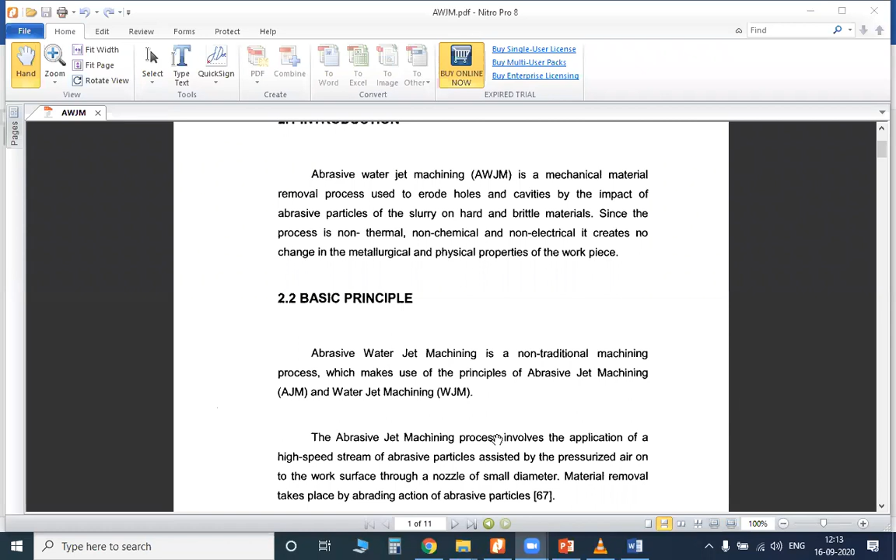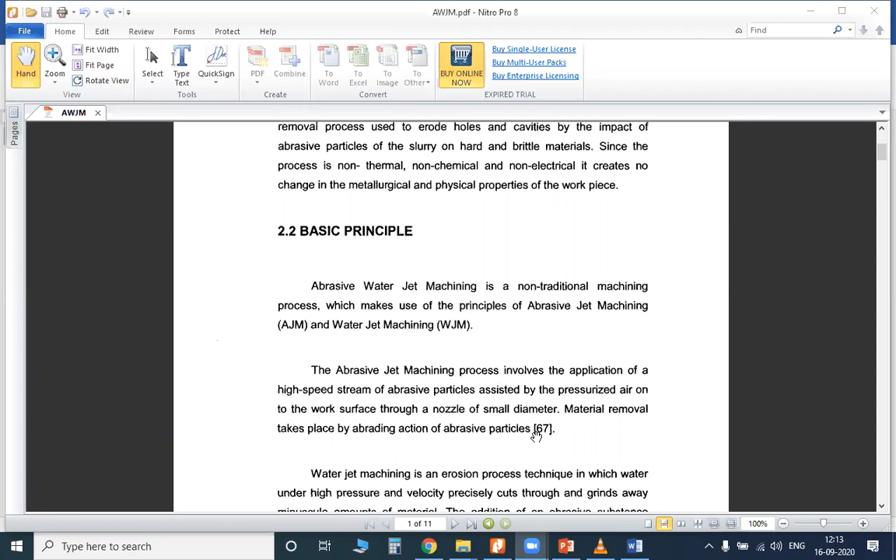Clear? The abrasive jet machining process involves the application of a high speed stream of abrasive particles, assisted by pressurized air, on the work surface through a nozzle of small diameter. The material removal takes place by the abrading action of the abrasive particles. This is the process they describe.

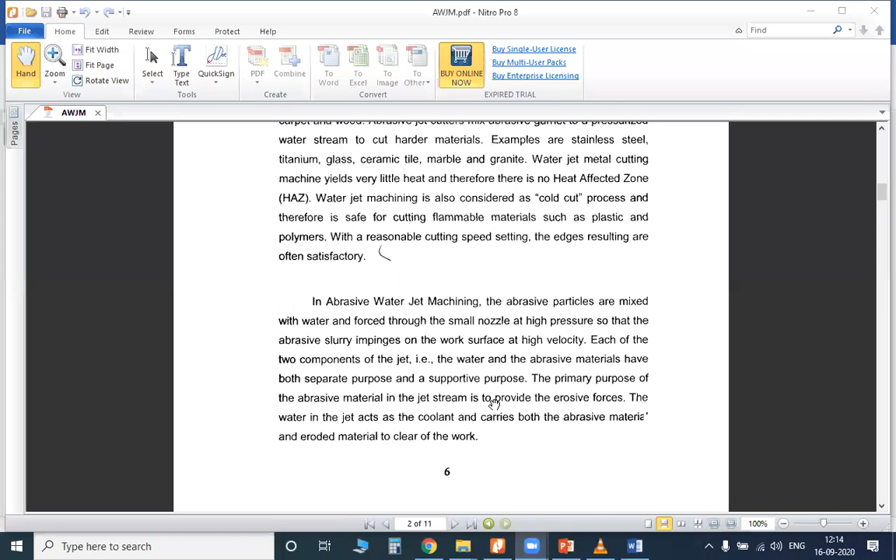So the diagram is... this is the diagram, students, of abrasive water jet machining. Here the workpiece is placed on a flat surface using some fixture, so the workpiece is constant and does not move. In one container, air or water is taken with the help of a control valve and pressure.

High water is to be sent into the mixing chamber. The parts of an abrasive water jet machining are: the workpiece, the nozzle, the mixing chamber, and the abrasive slurry, the abrasive particles which are going to be sent. The other parts are the control valve, the pressure relief valve, and the air filter cum dryer. These are the main parts of an abrasive water jet machining.

What considerations are to be taken in the process? The water is taken with the help of high pressure and a controlling valve. A filter is also inserted at this place. With the help of high pressure, the water is moved to the mixing chamber, and at the same time the abrasives are also moved to the mixing chamber.

When the abrasive hits the water, it converts into slurry, which is moved to the nozzle. The nozzle converts the liquid into higher kinetic energy. The total slurry moves through the nozzle, which acts to convert the liquid into higher kinetic energy. The nozzle has a very small diameter.

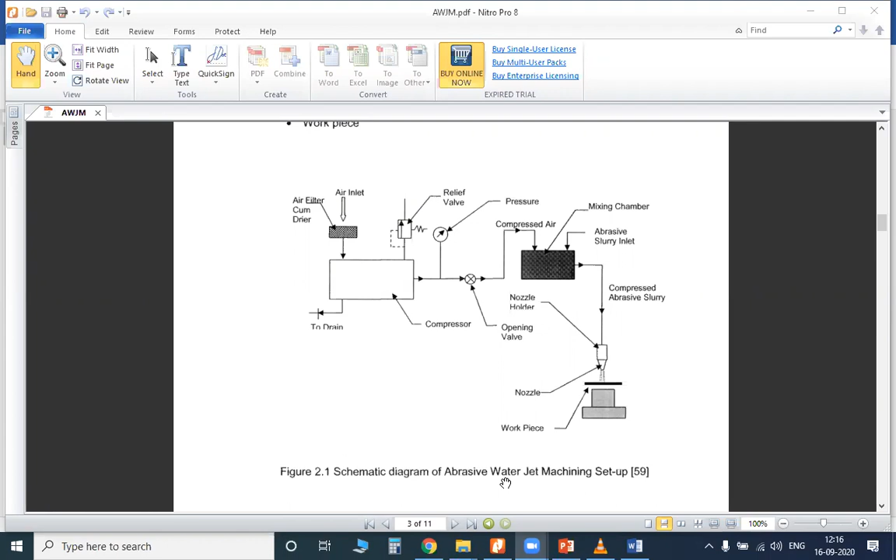Is this clear, students? This is the main process of abrasive water jet machining. The parts are the workpiece, the nozzle, the mixing chamber, and the abrasives taken here, along with the water content, the pressure valve and control valve. The water, with the help of a filter and high pressure, is controlled by the control valve which sends it to the mixing chamber. At the same time, the abrasives are sent to the mixing chamber.

When the abrasives strike the water, some type of energy is generated, and the total slurry moves to the nozzle. The nozzle tip is made up of tungsten carbide and has a very small diameter, not a large one. The nozzle acts to convert the liquid into high kinetic energy.

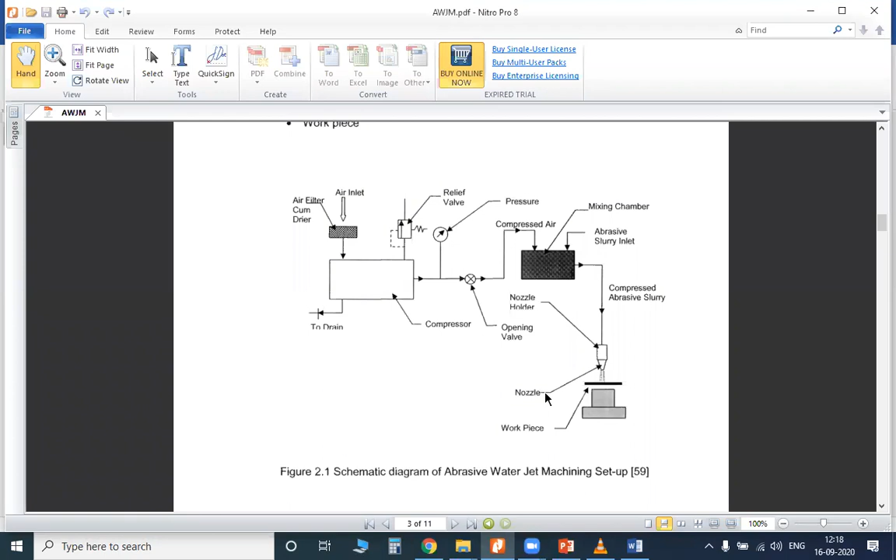We have to observe one thing: the water acts as a coolant when the abrasive particles are sticking on the workpiece. Due to the water, the particles which are stained or attached to the workpiece are vanished when the machining is completed. This is the process of abrasive water jet machining.

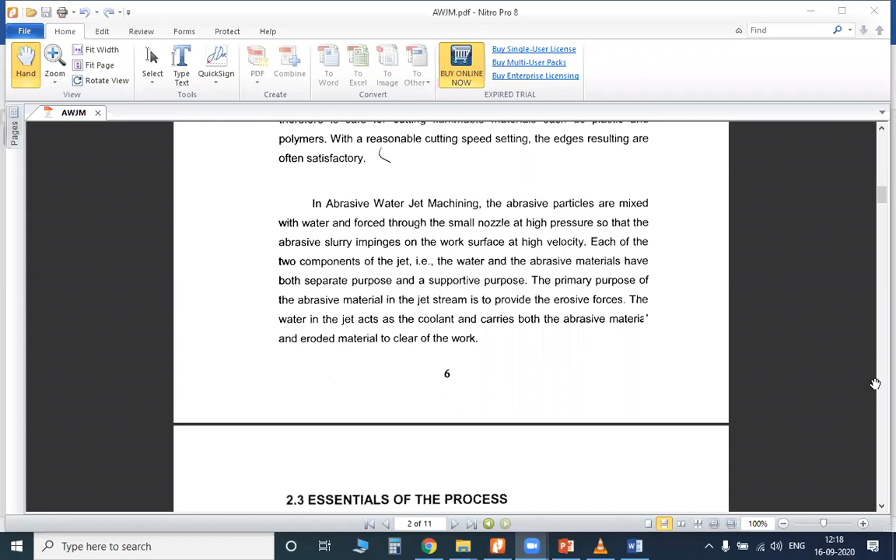Now we will see the points one by one. Water jet machining is an erosion process technique in which water under high pressure and velocity precisely cuts through and grinds away minuscule amounts of material. The addition of an abrasive substance greatly increases the ability to cut through hard materials such as steel and titanium. With only water jet machining we can't cut hard materials, so we mix both abrasives and water together to cut hard materials.

Water jet machining is a cold cutting process. One point to consider here is that it is not a heating process.

It is not a heating process, it is a cold process. It is not a heating process because it is having very little heat, because we are going to be using water.

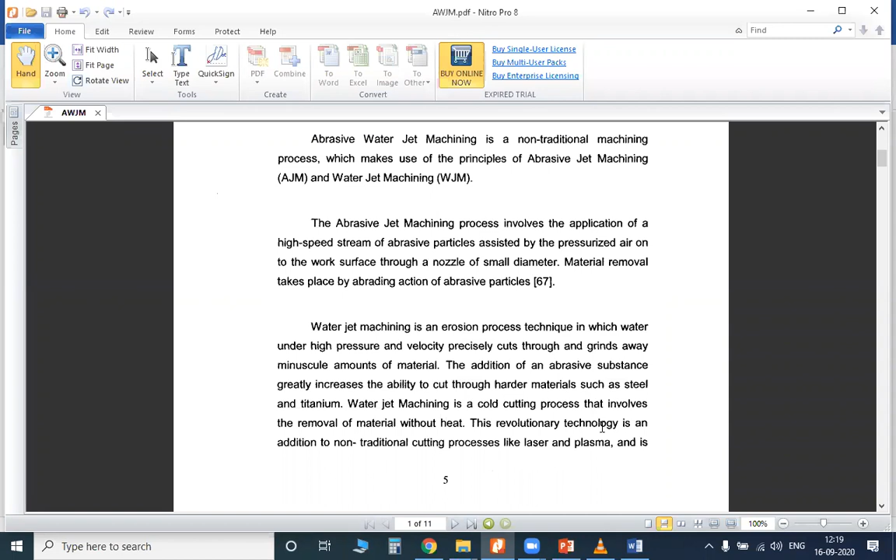It removes the heat of the abrasives which are going to be striking on the workpiece. So this revolutionary technology is an addition to the non-traditional cutting processes like laser and plasma, and is able to cut through virtually any material.

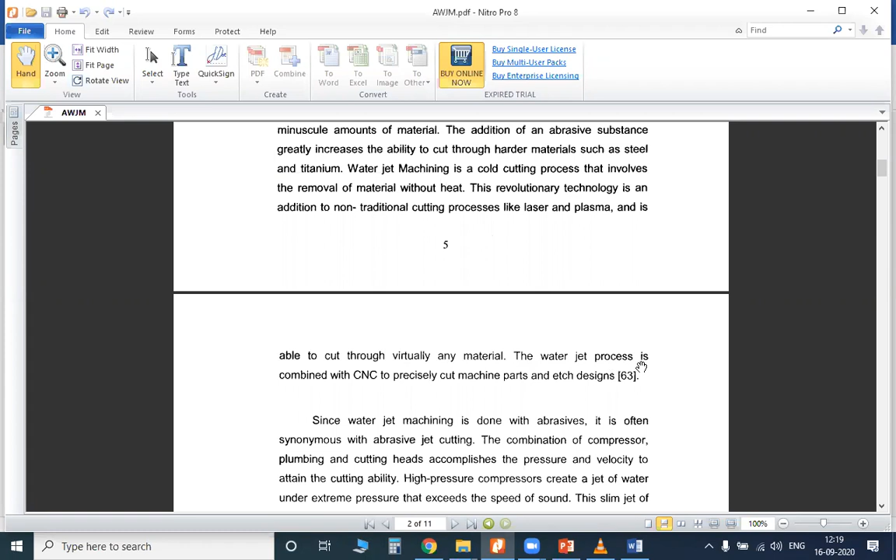So the water jet process is combined with a CNC. Here the total process is combined with a CNC.

See here students, purely water flow without an abrasive can cut materials such as foam, rubber, plastic, cloth, carpet and wood. The abrasive jet cutters mix abrasive garnet into a pressurized water stream to cut harder materials. So here they had given clearly, when only water is pressurized on the workpiece, what type of materials can be machined.

So these are the materials that can be machined. But when abrasives are mixed with the water, these materials can be machined: stainless steel, titanium, glass, ceramic tile, marble and granite.

So this abrasive water jet machining is purely used in heavy industries, to cut different types of materials, different types of machining, and different types of designs.

And here the abrasive water jet machining is also used for etch type designs. Etch type designs are nothing but what we can see on iron doors, the embossing of designs. So those types of designs can also be cut through abrasive water jet machining.

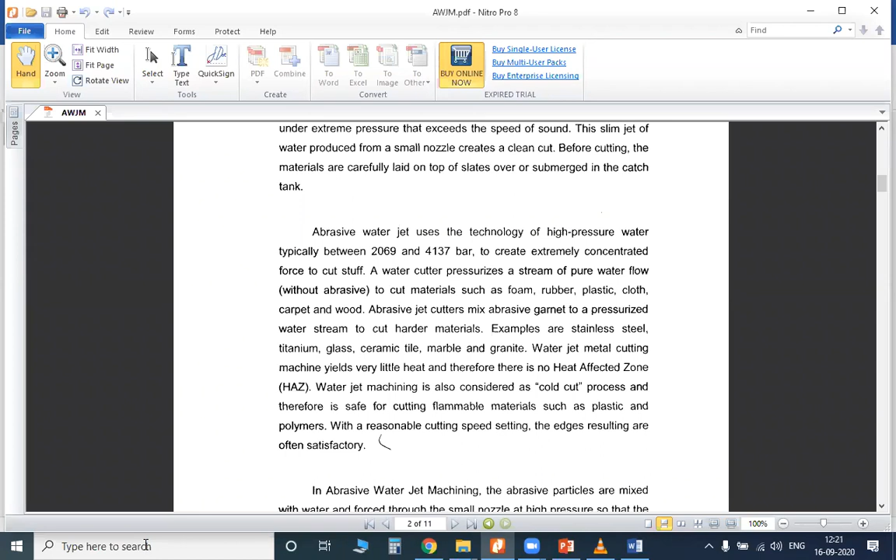Clear? So in abrasive water jet machining, the abrasive particles are mixed with water and forced through a small nozzle at high pressure, so that the abrasive slurry impinges on the workpiece at high velocity.

So each of the two components of the jet, the water and the abrasive particle materials, have both a separate purpose and a supportive purpose. Clear students, what I had told you now?

So the water in the jet acts as a coolant and carries both the abrasive materials and the eroded material to clear the work. So here both the water and the abrasives that you are considering act like the tool to cut and machine the workpiece.

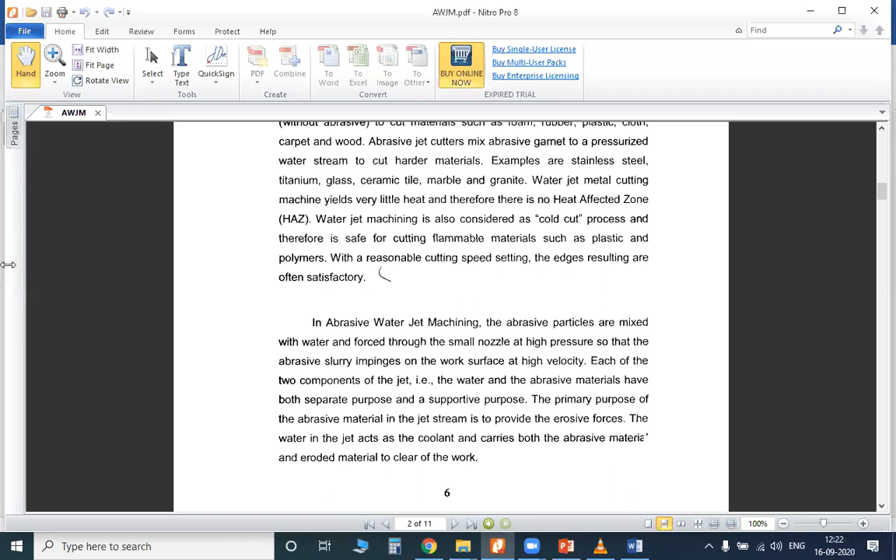At the same time, due to the water content, if any of the abrasive particles attach to the workpiece, it can be removed also. So both processes are taken together. So these are the different machining parts that are going to happen.

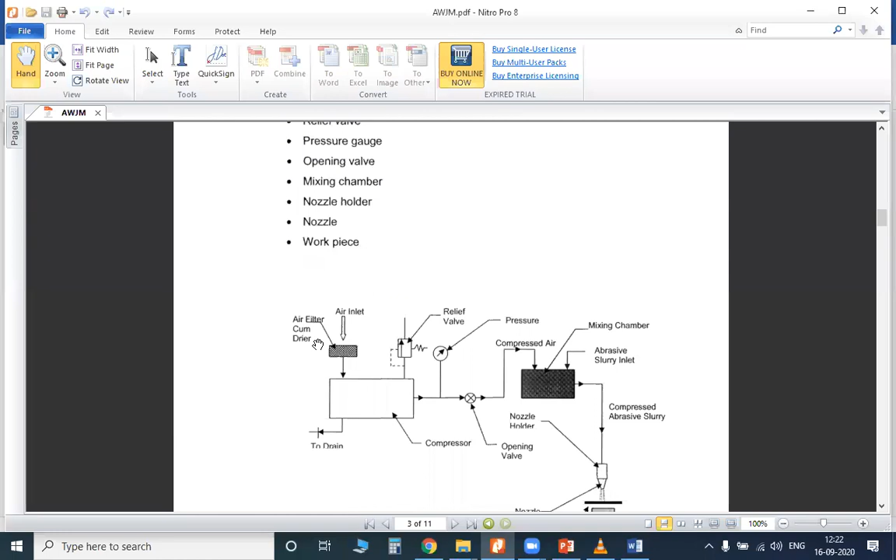And here, what is meant by an abrasive slurry? So the slurry in this process is a mixture of abrasive particles and a liquid content, mainly water. So the ratio of abrasive to liquid - this is the doubt you have to clear - can vary from 1:6 to 1:14.

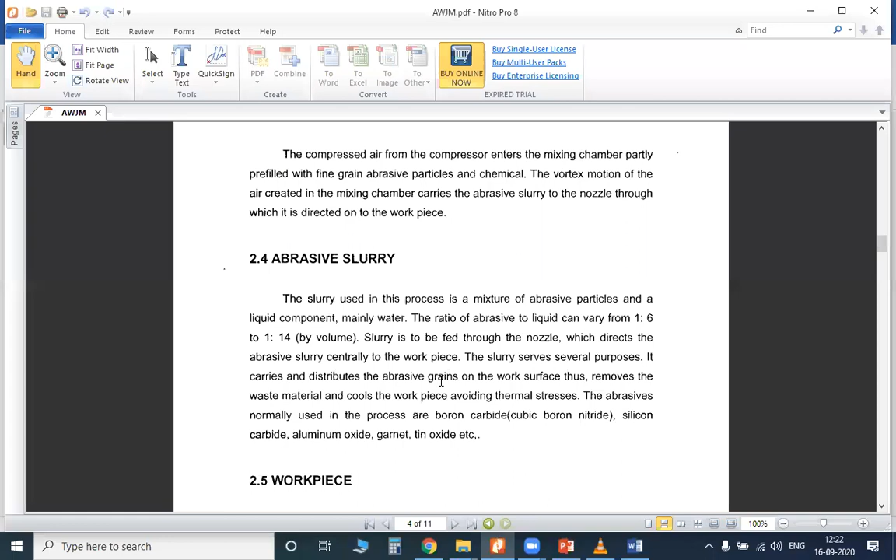So in this ratio, both are taken. So the slurry is fed through the nozzle, which directs the abrasive slurry centrally to the workpiece. So in this nozzle, the total content is taken in the center of the nozzle, not in the walls of the nozzle or any other place.

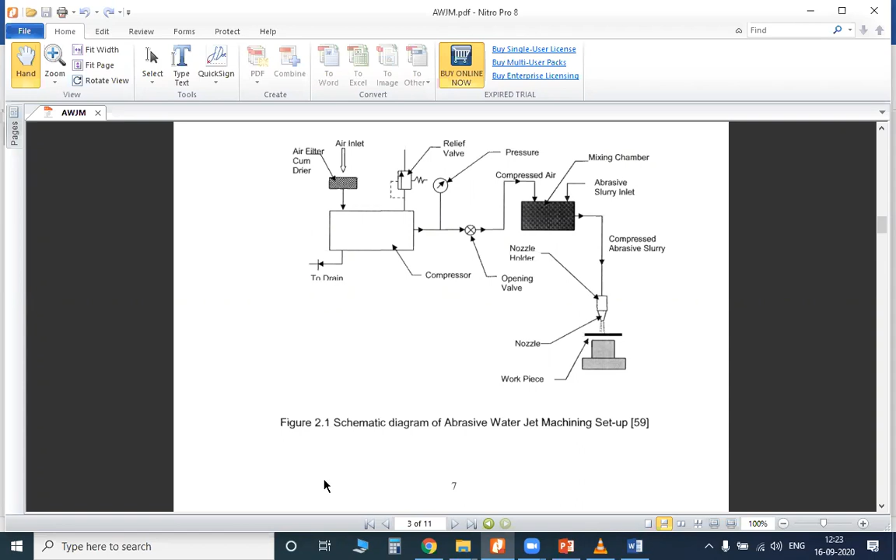It is directly striking on the workpiece, perpendicular to the workpiece. Clear? And here the slurry serves several purposes.

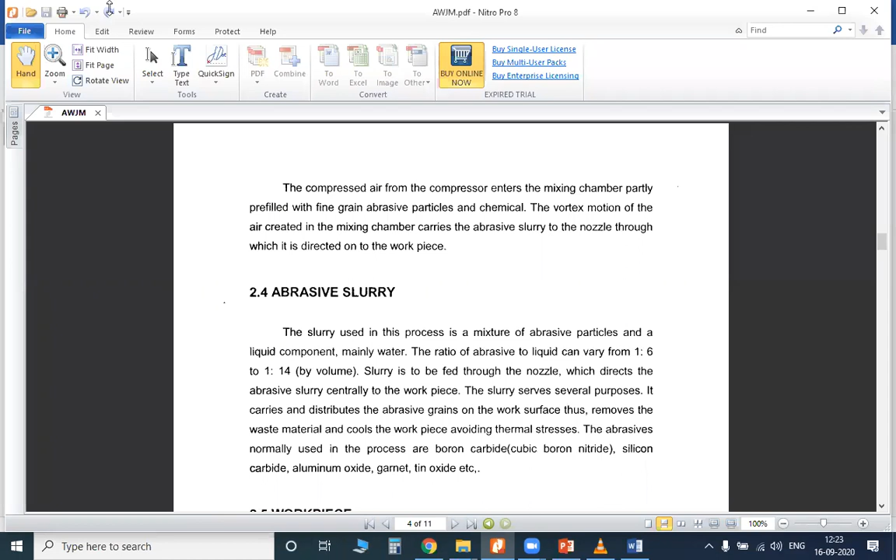It carries and distributes the abrasive grains on the work surface, thus removing the waste material and cooling the workpiece, avoiding thermal stresses. So the abrasives used here are boron carbide, cubic boron nitride, silicon carbide, aluminum oxide, garnet, and tin oxide, etc. These are the basic abrasives used in abrasive water jet machining.

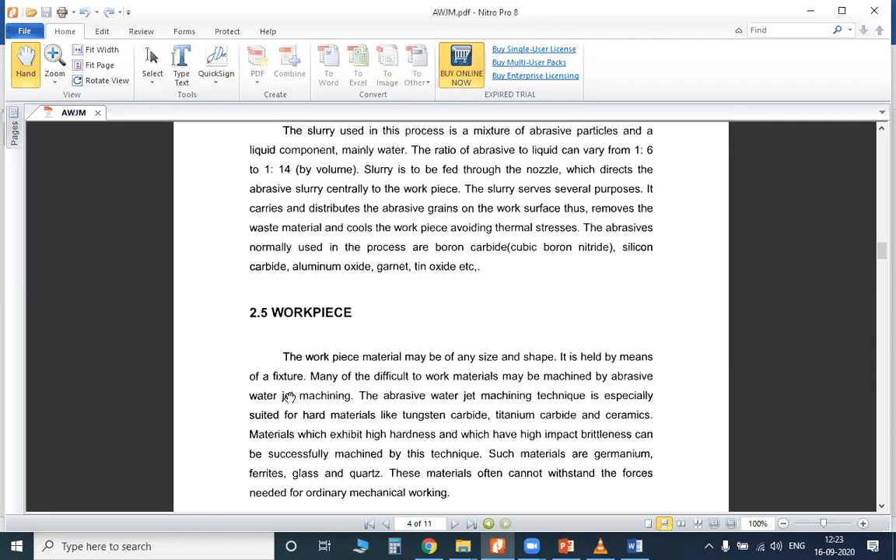So here the workpiece material may be of any shape and any size. It is held by means of a fixture. So many difficult-to-machine work materials may be machined by abrasive water jet machining.

So if the materials have very hard toughness properties, those types of materials can be easily machined with the help of abrasive water jet machining. Clear. So hard materials like tungsten carbide, titanium carbide, and ceramics - these types of things can be machined.

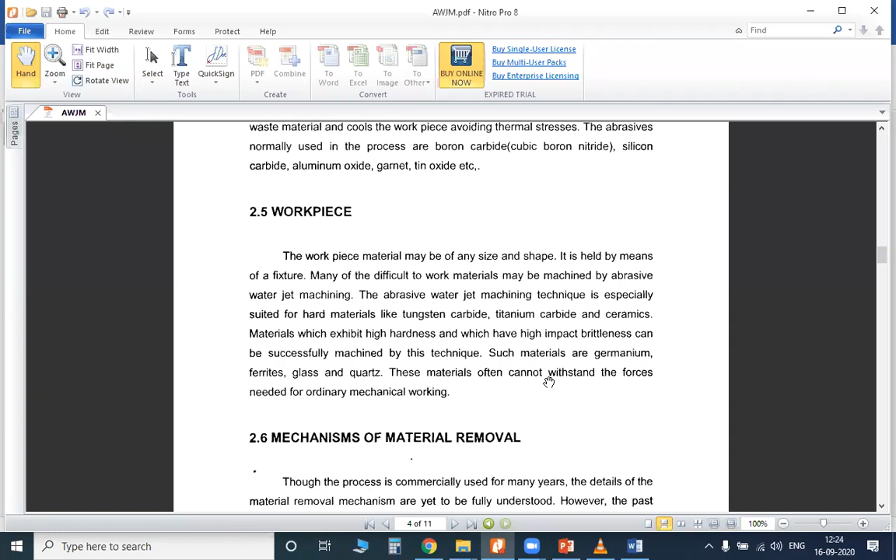And materials like germanium, ferrites, glass and quartz also. So the mechanism of material removal here is the direct impact of the abrasive particles on the workpiece.

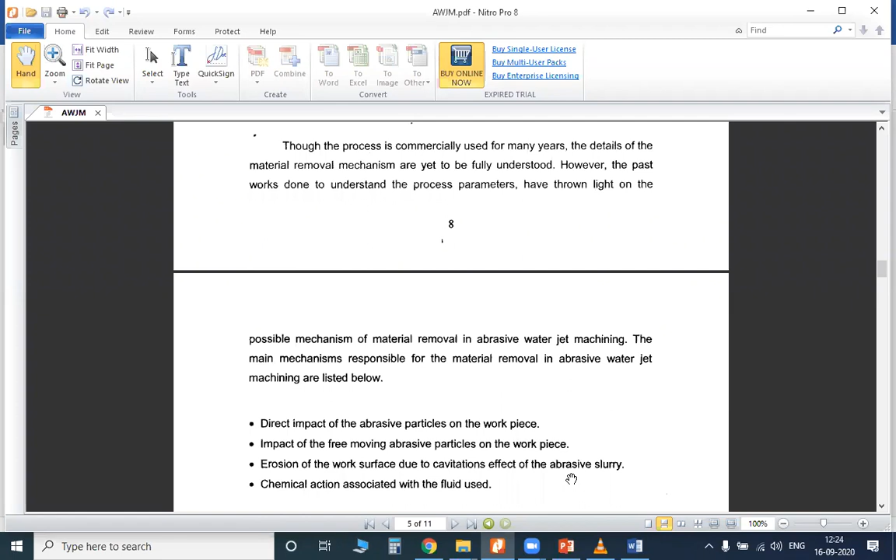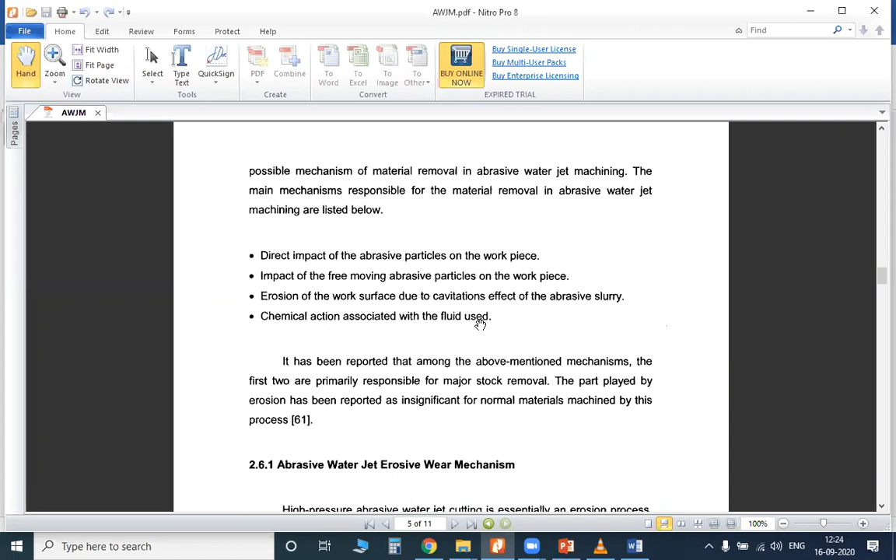So it's the impact of the freely moving abrasive particles on the workpiece, erosion of the work surface due to the cavitation effect of the abrasive slurry, and chemical action associated with the fluid used. So these are the material removal processes that are carried out here.

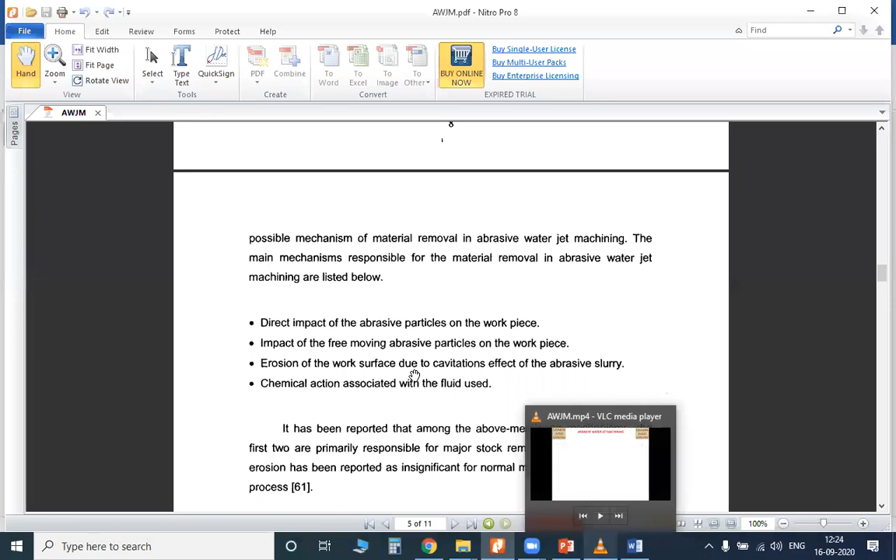So now we will see the video, an animation video, showing what is going to happen for abrasive water jet machining. Clear?

So this is a video of abrasive water jet machining. In this, one pipe is taken, and against it, a control valve is connected. Next to the tip of the pipe, a nozzle is connected.

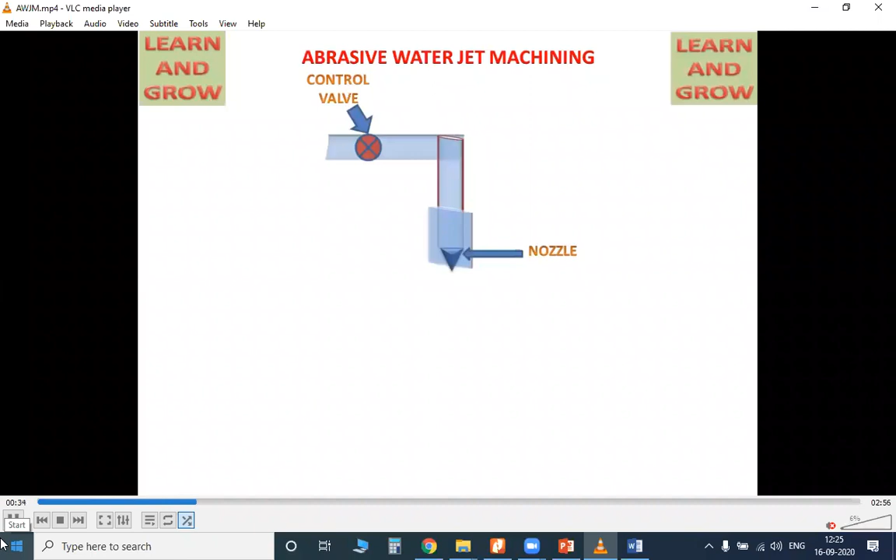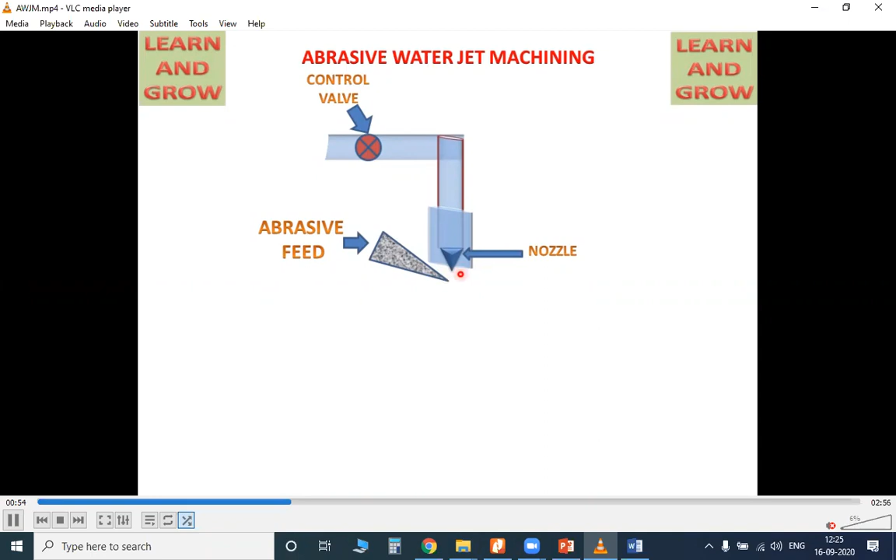The nozzle is made up of titanium and tungsten carbide. Here the abrasive feed is taken, so the ratio of abrasive to water content is taken to the slurry mixing chamber. The abrasive feed can be silicon carbide, aluminum oxide, boron carbide, or any other abrasive, depending on the workpiece material. It can be chosen accordingly.

So the abrasive tube is connected to this mixing chamber for the abrasive feed. At the same time, water, through a nozzle with a very small diameter, is poured into the abrasive tube. The workpiece is placed on a fixture which cannot be moved; it is a standard setup.

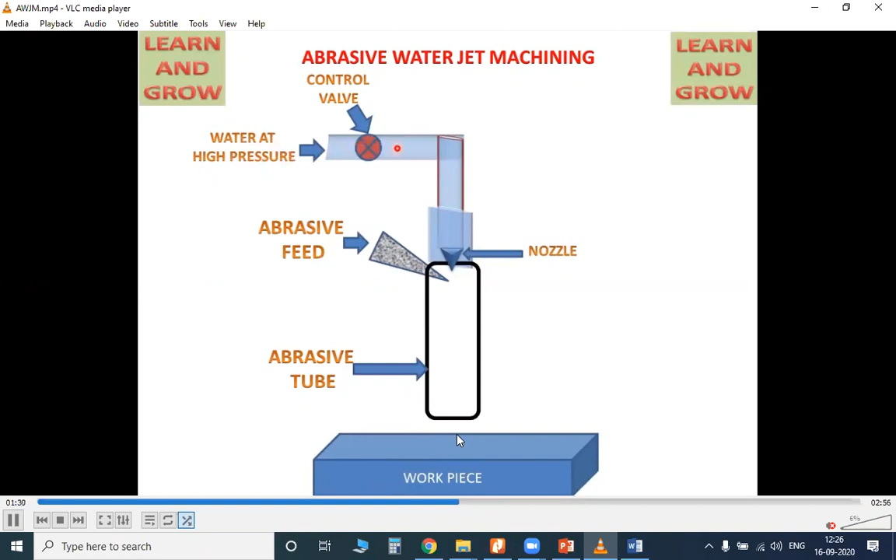Due to the nozzle, mixing takes place, and from this nozzle it converts the liquid into higher kinetic energy. This is the total chamber. From here, water at high pressure is given, and from here the inlet is pumped. So from the nozzle, it centrally strikes over to the workpiece.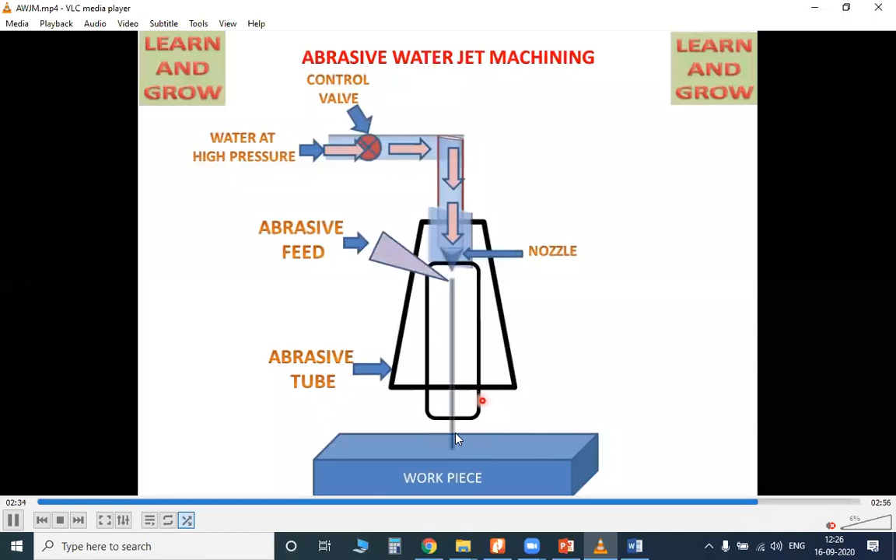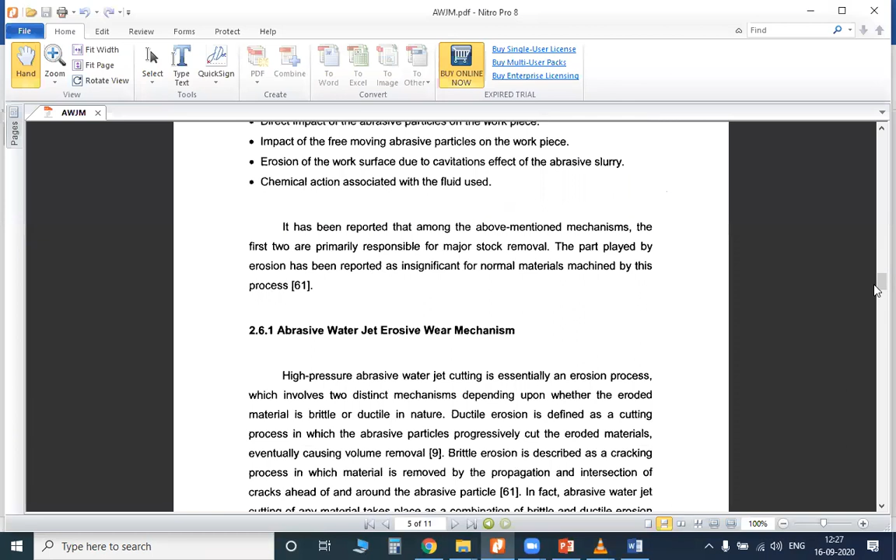Yes friends, so this is nothing but abrasive water jet machining. So we will see what are the disadvantages, what are the advantages, and what are the applications.

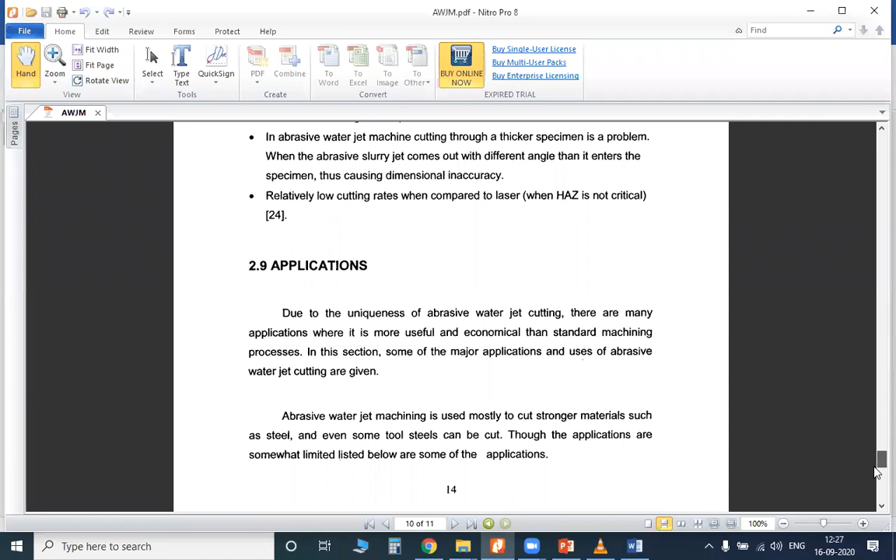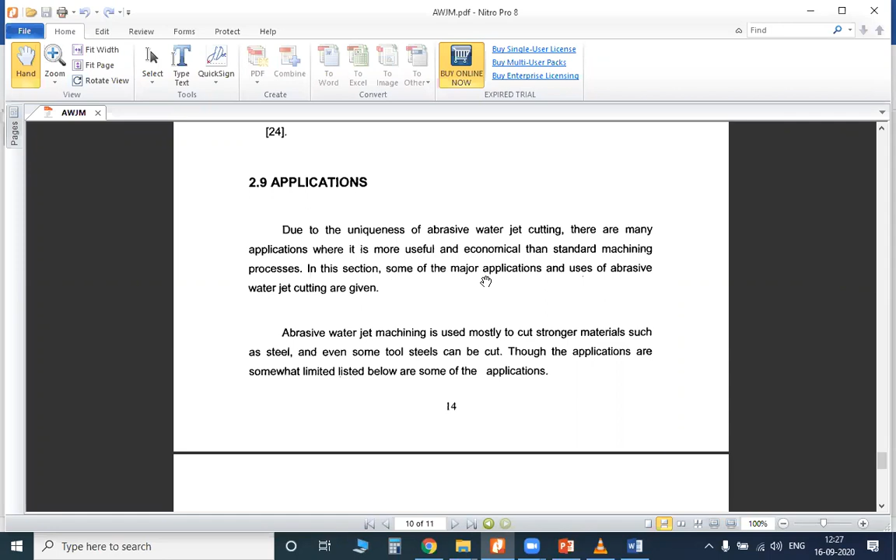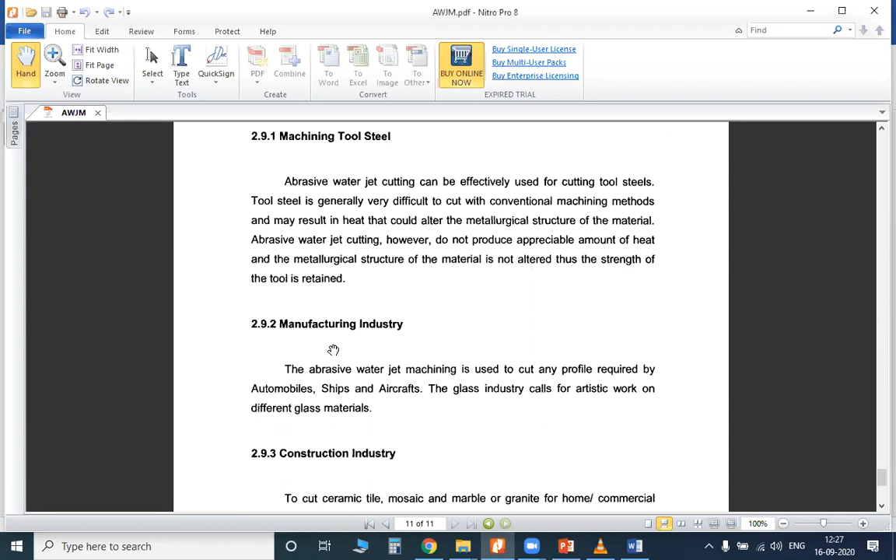Due to the uniqueness of abrasive water jet cutting, there are many applications where it is more useful and economical than standard machining processes. In this section, some of the major applications and uses of abrasive water jet cutting are given, such as machining tool steel, manufacturing industry, and construction industry. These are the main application points.

Machining tool steel: abrasive water jet cutting can be effectively used for cutting tool steels, which are generally very difficult to cut. Stainless steel or steel is very difficult to cut, but with the help of abrasive particles combined with water, it can be done easily. Cutting with another conventional process may generate heat that alters the metallurgical structure of the material, changing the properties of the steel. To avoid changing these properties, we use abrasive water jet machining, because the water helps reduce heat so the properties of the steel are not changed.

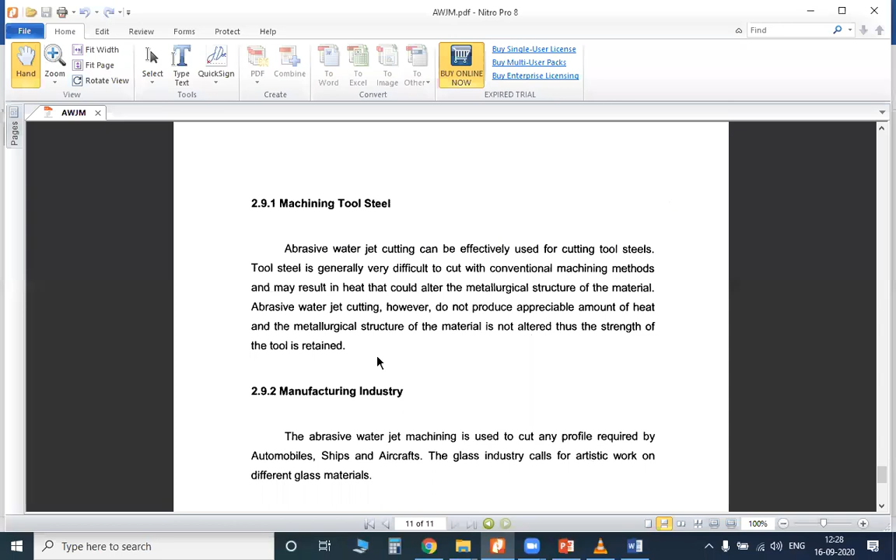In the manufacturing industry, abrasive water jet machining is used to cut any profile required by automobiles, ships, and aircraft.

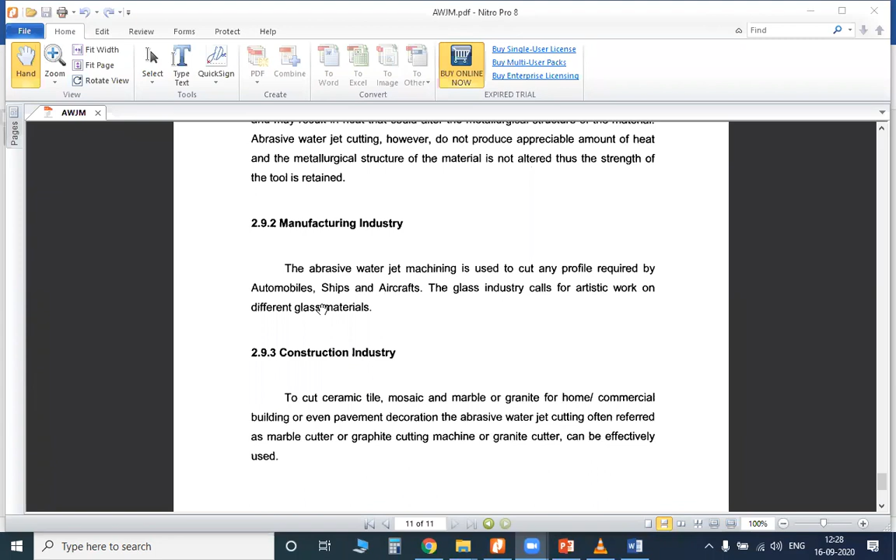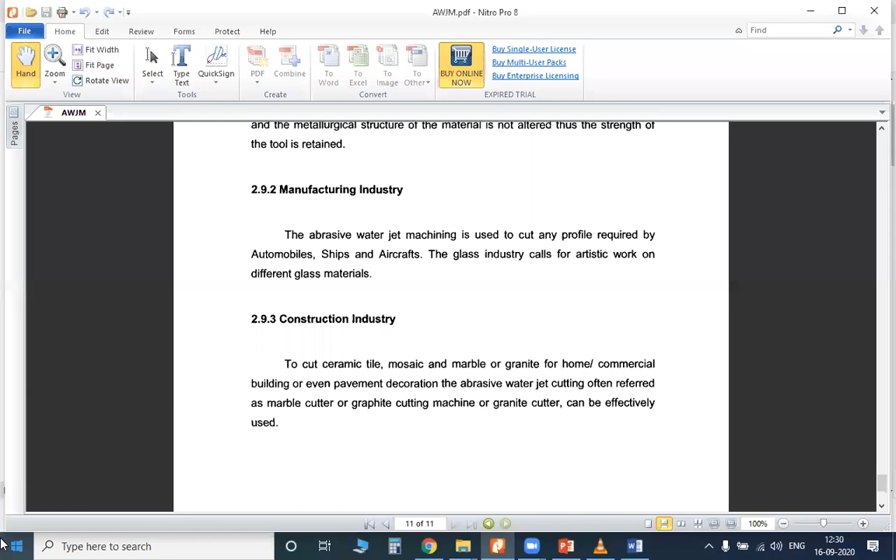In the construction industry, to cut ceramic tile, mosaic, marble, or granite for a home, commercial building, or even pavement decoration, abrasive water jet cutting is often referred to as a marble cutter, graphite cutting machine, or granite cutter. When you want different designs in home interior design—which is becoming more and more popular—this type of abrasive water jet machining is very effectively used to cut marble into different shapes and sizes.

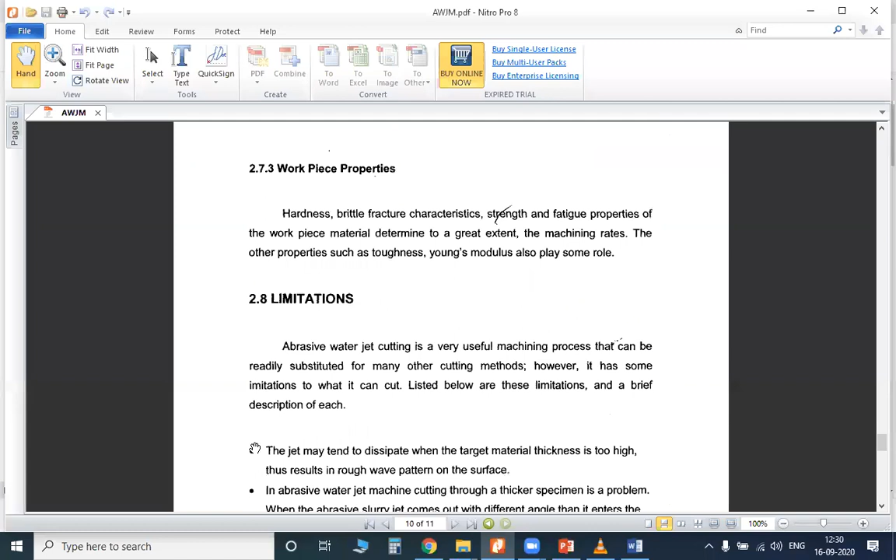So the limitations of abrasive water jet machining: it is a very useful machining process that can be readily substituted for many other cutting methods. The limitations are like the jet may tend to dissipate when the target material thickness is too high, thus resulting in a rough wave pattern on the surface. So in abrasive water jet machining, cutting through a thicker specimen is a problem. It is a real problem to cut a thicker specimen.

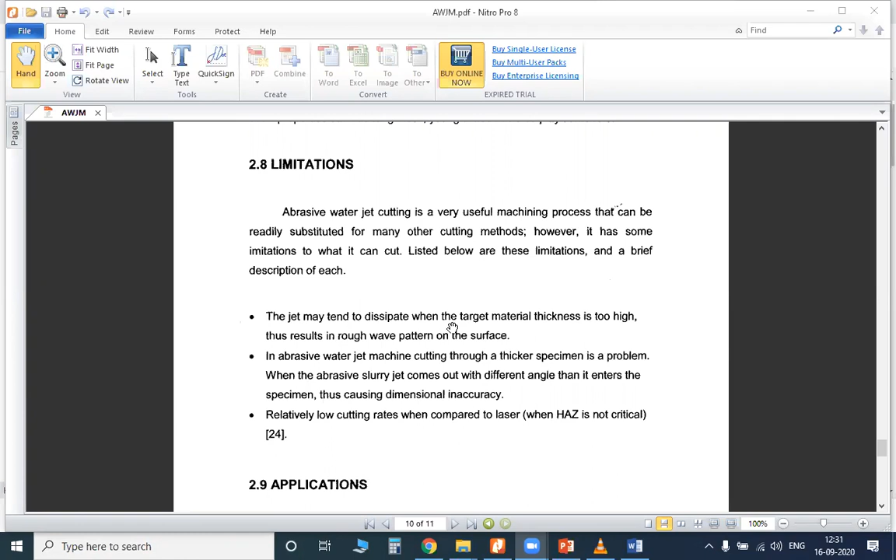So when the abrasive slurry jet comes out at a different angle than it enters the specimen, thus causing dimensional inaccuracy. So whatever the operation is being carried out, whatever the process is being carried out, the target is always that the slurry directly targets the workpiece, not another part. There are also relatively low cutting rates when compared to laser. So these are what is meant by abrasive water jet machining.

Yes friends, now we will move over to ECM. So in the last class we completed abrasive jet machining, ultrasonic machining, and now you have completed abrasive water jet machining. So now we will take up ECM, electrochemical machining.

I think you know what is meant by Faraday's law of electrolysis. Electrochemical machining is totally based on Faraday's law of electrolysis. By the name, electrochemical machining is known as ECM. It is based upon Faraday's law of electrolysis. Faraday's law states that the mass of a metal altered at the electrode is proportional to the quantity of electric charge transferred to that electrode. So in ECM, the metal removal rate is controlled by anodic dissolution in the electrolyte.

In the electrochemical machining process, the process is totally carried out with the help of an electrolyte. Here the electrolyte used is sodium chloride. So how it is connected and what happens in an electrochemical machining process, we will see. The workpiece is connected to the positive terminal, the tool is connected to the negative terminal, and the electrodes should be placed closely with a gap of 0.5 mm.

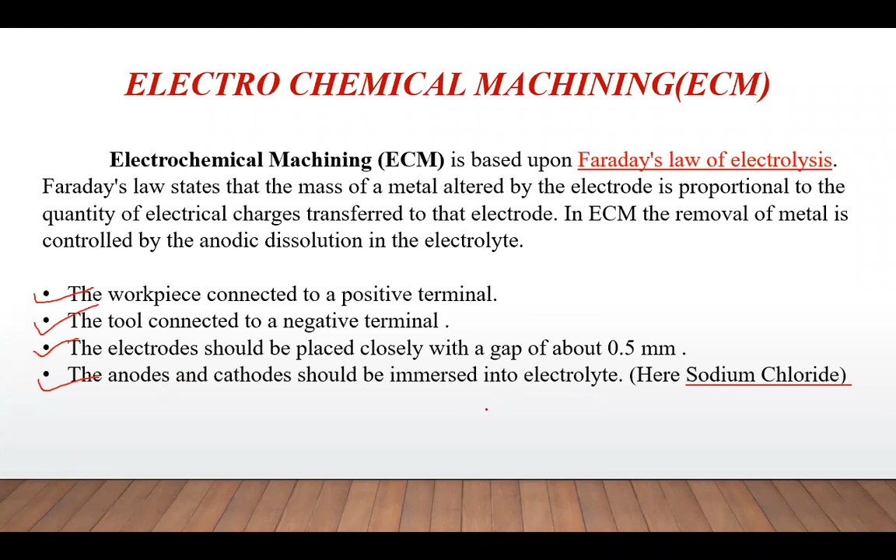So what is the function of an electrolyte? We have to know the functions of an electrolyte. First, the current is carried between the tool and the workpiece through the electrolyte. Second, the produced heat is dissipated by the liquid electrolytic solution. Third, the products of machining are removed by the solution. And fourth, it keeps the reaction continuous by supplying the elements necessary for the reaction. These are the main functions of an electrolyte.

Here we are going to use a DC power supply. For the DC power supply, the workpiece is connected to the positive terminal and the tool is connected to the negative terminal. Besides the DC power supply, the tool is connected to a servo motor, and the servo motor is connected to the electrolyte, where the electrolyte is taken in a certain basin containing sodium chloride.

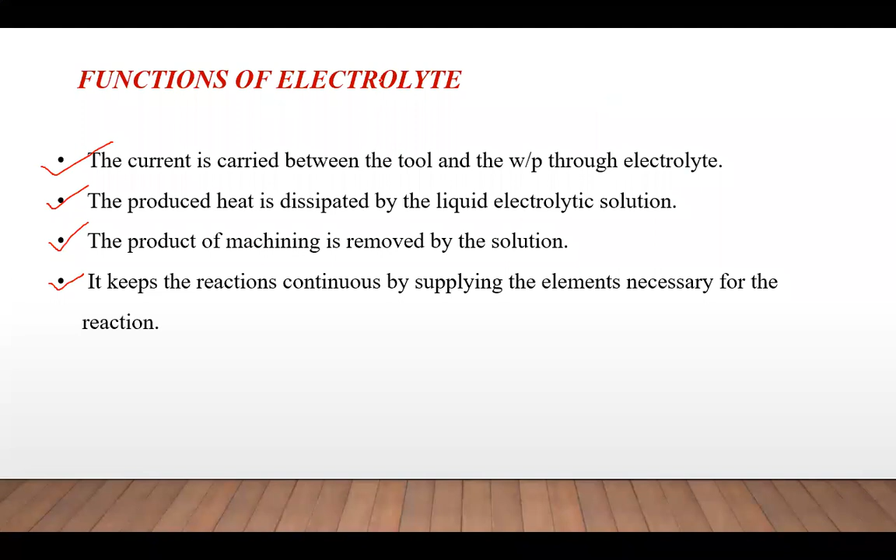So next, this is the diagram, students. The workpiece is fixed on a fixture. It is not to be moved; all degrees of freedom are fixed.

Next, the electrolyte is taken in a certain basin. From the electrolyte, a hollow shaped pipe is connected to a pump. To this pump is connected a filter, pressure gauge, flow meter, and a DC power supply. As I told you, for the DC power supply the workpiece is connected to positive and the tool is connected to negative.

So a constant feed is taken. Here, due to the electrolyte, the fluid which is passed from the pump carries out the workpiece operation. The filter is used, the control valve is taken, and the pressure is also taken. Next, before starting all this, we will see a video of how the process is carried out. Okay.

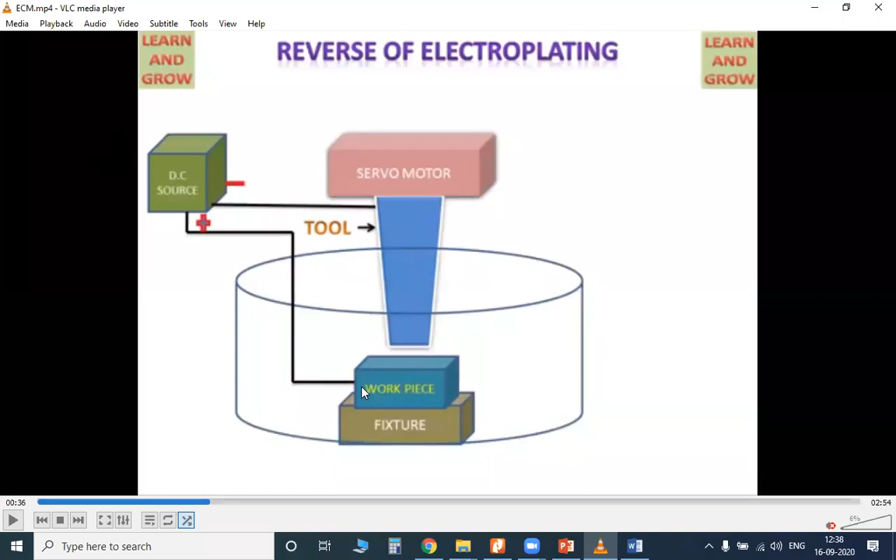The tool is connected to a DC source, and the workpiece is also connected to a DC source. The workpiece is connected to the positive terminal and the tool is connected to the negative terminal. The electrolyte is taken in another basin, and in the electrolyte a hollow shaped pipe is to be followed.

This is the pump where the electrolyte is passed, and with the help of a filter, the electrolyte is forwarded over to the tool and strikes over to the workpiece. From the filter it passes through, and with the help of a pressure gauge it is controlled, and with the help of a flow meter, the total electrolyte is passed over to the tool.

When the pump is started, the electrolyte passes to the tool, and from the tool it directly strikes on the workpiece. As the electrolyte passes over to the workpiece, it is directly melting.

So here you are not using any type of abrasive particles. With the help of a chemical, you are going to be cutting the workpiece. When the pipe strikes perpendicular to the workpiece, it explains that the workpiece is melting at a certain area. So it is directly used for drilling holes. It can be very useful.

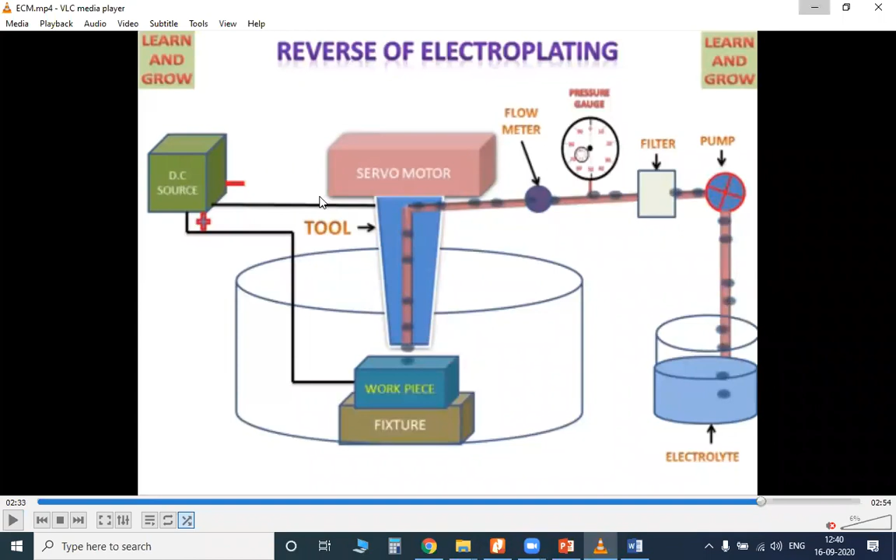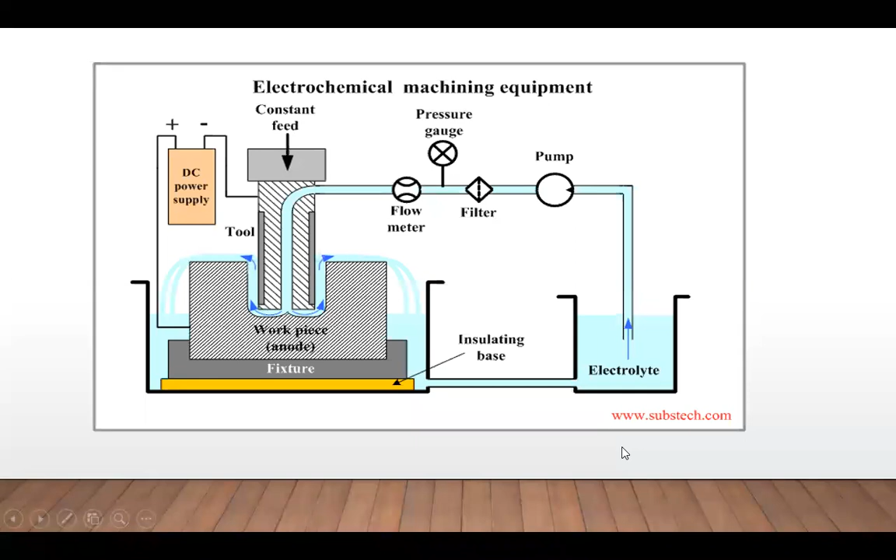So this is the diagram which we had seen in the video. The principle of ECM: the potential difference is maintained between the electrodes. As a result, ions existing in the electrolyte migrate towards the electrodes.

Conventionally, positively charged ions are attracted towards the cathode, and the negative ions are attracted towards the anode, and thus the flow of current is initiated in the electrolyte. So the workpiece here acts as an anode and the tool acts as a cathode.

The setup is kept stationary, and the tool is fed linearly over to the workpiece. The desired amount of material is removed because of ion migration towards the tool, and due to this ion migration, the desired amount of material is removed from the workpiece.

For keeping the tool safe from damage, a continuous supply of electrolyte is ensured by pumping it at high pressure. The pressure is maintained at 15 kg per centimeter square under the ECM process.

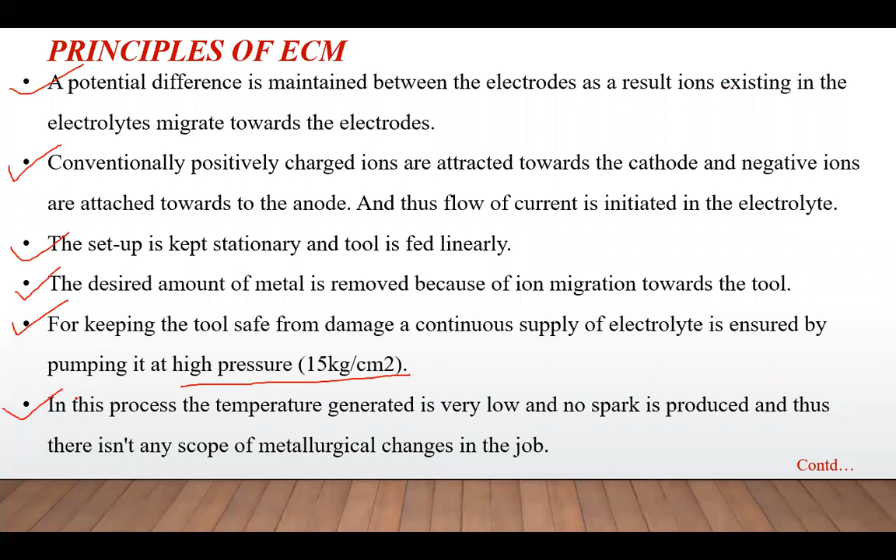In this process, the temperature generated is very low and no spark is produced, and thus there is no scope of metallurgical changes in the job. This explains that whatever process is followed, no spark is produced, and due to this there is no change in any properties of the material of the workpiece.

When electricity is supplied, the metallic ions of the workpiece are pulled out. The positive ions of the metal react with the negative ions present in the electrolytic solution, forming hydroxides of the metal and other components. These hydroxides are precipitated and washed away by the electrolytic solution.

We had known that the workpiece is connected to the positive, and the tool is connected to the negative; the workpiece acts as an anode and the tool acts as a cathode. The electrolytic solution sent through the pipe into the hollow space directly strikes over to the tool, and from the tool it moves in a linear direction over to the workpiece.

So in electrochemical machining, the tool and the workpiece do not come in direct contact with each other. So negligible wear and tear is observed; it is a very light wear and tear. The MRR is very high and the voltage supplied is very low.

In this process, the MRR is high and the voltage supply is very low. So the metallic workpiece is not damaged due to thermal stresses, and the workpiece is not damaged at all. Dimensions up to 0.05 mm can easily be machined.

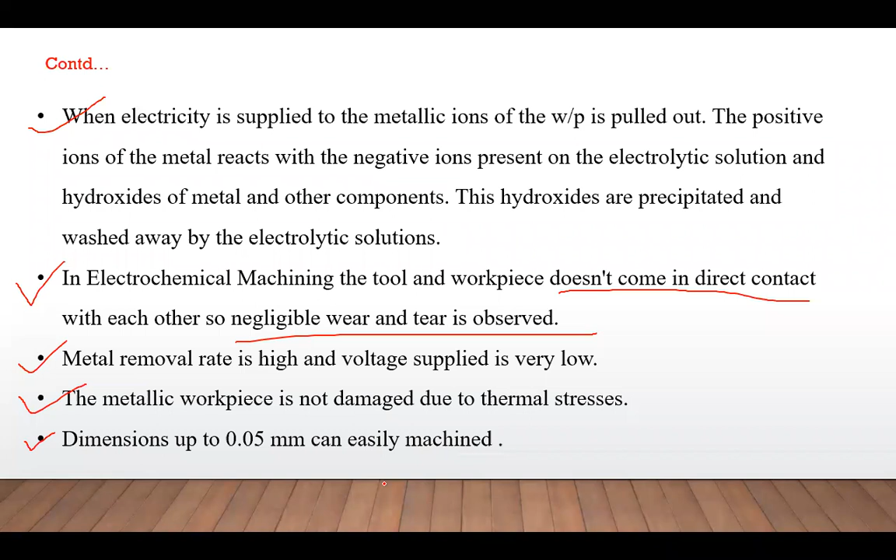The advantages of ECM are accurate machining, no direct contact between the tool and the job, negligible wear and tear of the tool, it is environment friendly, and no thermal or mechanical stresses are induced on the tool. You had seen in the video that there is no contact between the workpiece and the tool.

Jobs with complex geometric shapes can be machined. The main usage of a non-conventional machining process is that different types of intricate shapes can be manufactured. ECM is a time saver, very much so when compared to a conventional machining process.

During drilling, several holes can be done at once. Deburring can be done in hard to access areas. Fragile and brittle materials which are prone to damage can be machined easily in ECM without cracking or breaking, without having any fractures or any pores on the workpiece. The surface finish achieved is up to 25 microinches.

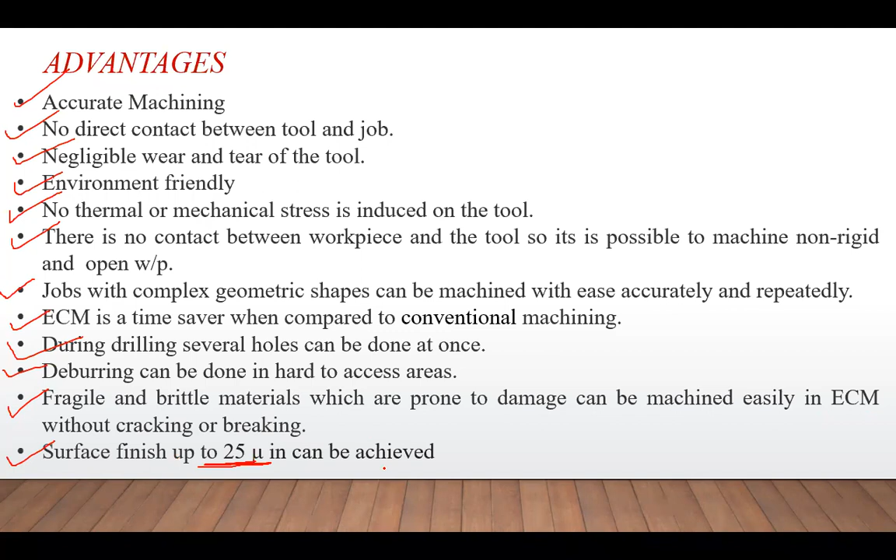Now coming to the disadvantages. Sometimes the process is costly because the equipment is very expensive, so the process is somewhat costly.

Continuous supply of electrolytic solution is mandatory. The main disadvantage is that the process has to be continued because you need a certain amount of electrolytic solution on the tool continuously. You can't stop the total process midway; it has to be continued.

The steady voltage or potential difference should be maintained; the voltage has to be kept constant and not fluctuated. Rigid fixturing is required to withstand the high flow rate of electrolytes. For that sake, the workpiece is placed in a fixed chamber so that it cannot move in any direction.

Designing of the tool is difficult because it must be insulated to maintain perfect conducting paths towards the workpiece. Corrosion free material is needed for the structure and the electrolyte handling unit. When all this has to be maintained, the total machining automatically becomes more expensive.

If hydrogen is liberated at the tool surface, it is possible to suffer from hydrogen embrittlement of the surface, so this has to be controlled. There is also a possibility of damage because of sparks. Conventional machining techniques produce more improved fatigue properties than ECM.

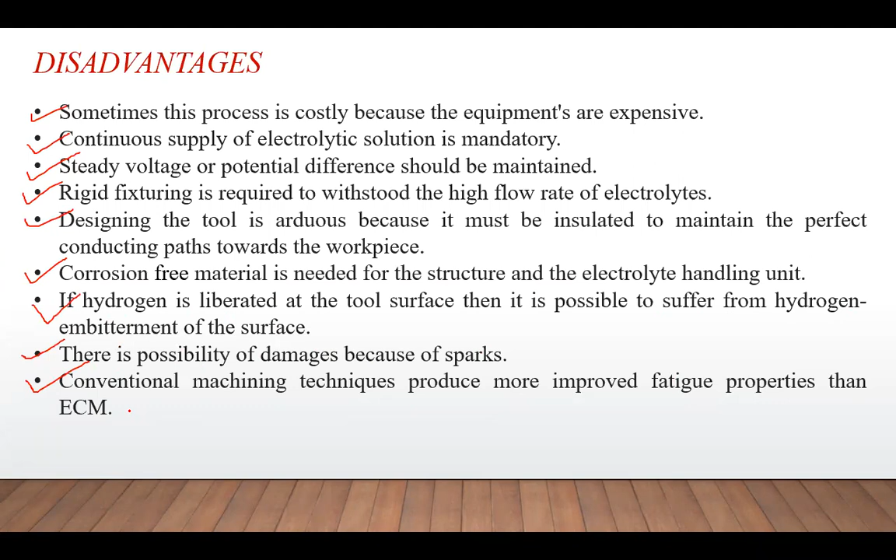Different industrial applications have been developed based on electrochemical machining, like cutting in ECM, broaching, drilling, and deburring. These types of machining processes are used in aerospace industries where more accuracy is important, and also for complex shapes which are difficult to machine by other means.

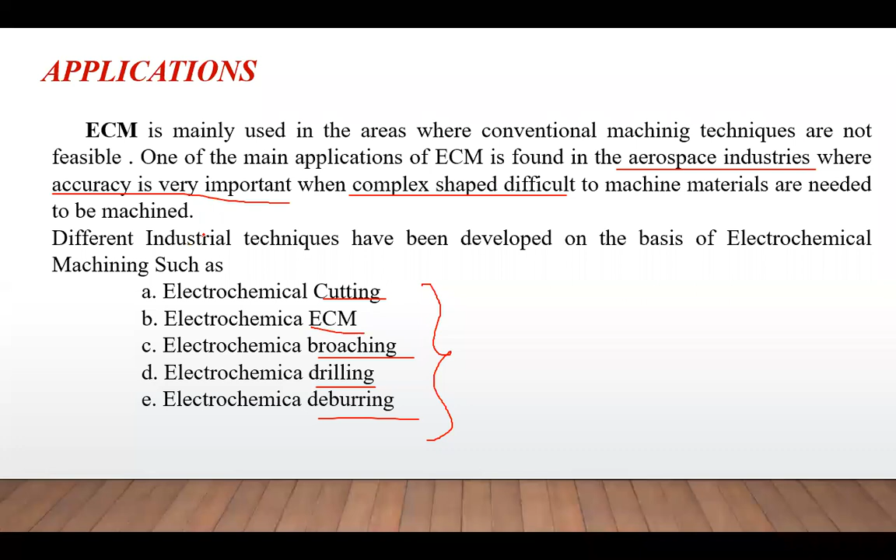These are the main examples: different parts machined by electrochemical machining include turbine blade material, thin slots, and the integral airfoils on the compressor disc. These are the different examples which can be done using an electrochemical machining process.

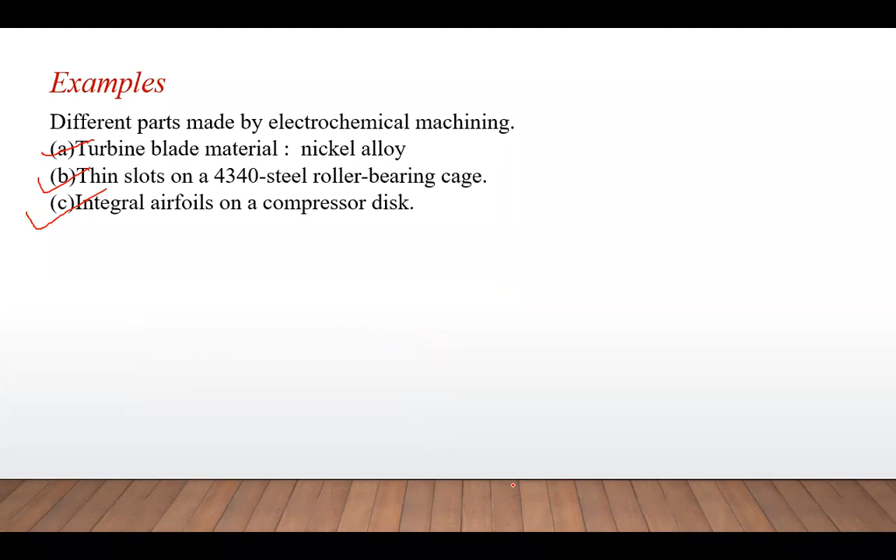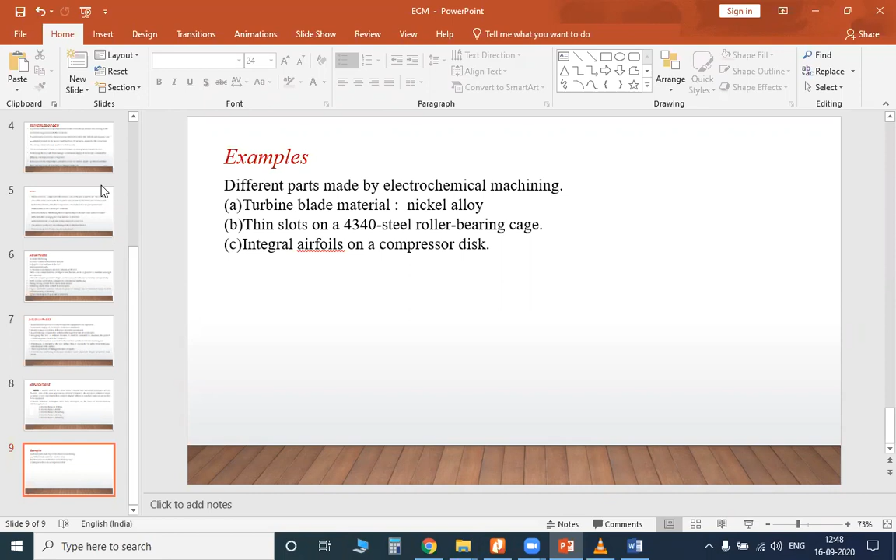So this is nothing but an electrochemical machining process, carried out totally with the help of Faraday's laws of electrolysis. These are the different types of machining processes carried out, and with the help of these, we can manufacture a very small miniature hole, and different types of shapes and sizes as well.

In the next class, we will learn about electron beam machining and laser beam machining. Those are the two topics left over with this.